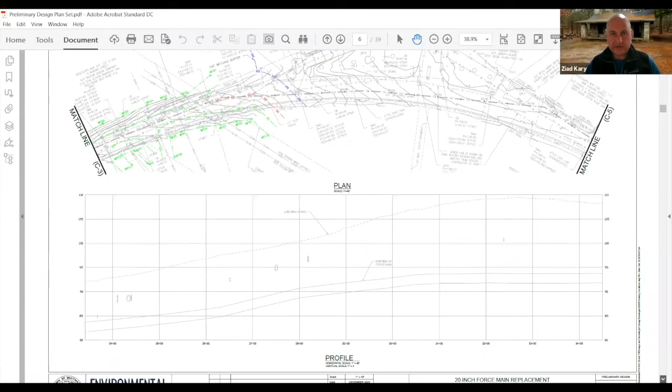Just a question on existing utilities: how much, if any, was done via test pits or investigation, or is it all just from record drawings?

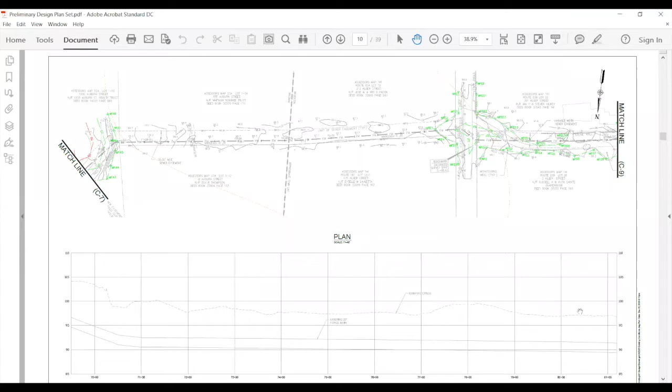So when we hired the surveyor to go out there, they did do a few things. For the gravity sewer, they shot rims and inverts and connected the dots for alignment, the proper way of doing it. They did the same for drainage, and for the force main we went back and forth, but located the manholes, air release valves, and blow-off manholes, securing the alignment that way. A lot of it was also record drawings and available information—no test pits were done, just anything visible on site compared to the records and confirmed that way.

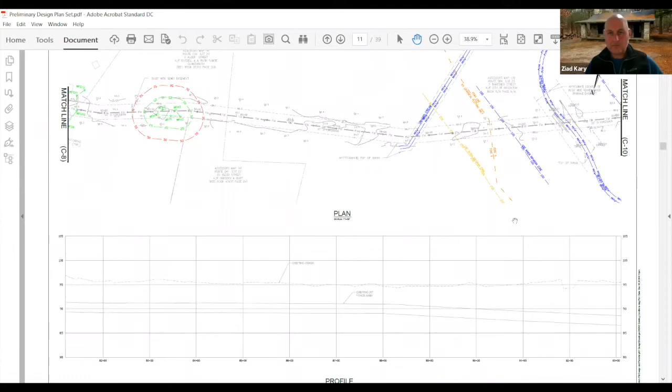So here we're still in the existing condition plan, and that's really for the whole alignment for the 16,300 linear feet.

Let me jump to this. Okay, so this is the Auburn Street facility, the pump station. Feel free to stop me if you have any questions.

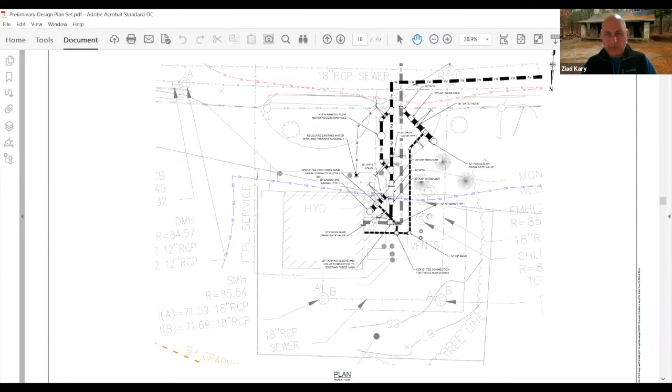Okay, and then we would leave the station. This is all happening on Auburn Street, so you could see it's staying to the south of the page. Anything you see here in the inset is for the other two pump stations, all connecting to the existing force main. Obviously you want to connect them to the new force main.

The way to do it, there's the blow-up detail further down. We could cover that as we go.

The profiles and cross sections show the crossing utilities, whether it's drain or gravity sewer. We do have the records for the existing sewer services. We have the records for water. Everything is there, done in pipe network.

The force main kind of stays at average depth. You don't want it to be shallow because you don't want anybody to hit it. You want it to be somewhere between 5 and 7 feet, and that's what we're trying to maintain all along.

Anything within the town right-of-way here on Auburn Street happens to be plastic pipe. It's PVC, DR18. It's a pretty thick pipe, robust, and rated for 235 pounds of pressure.

Same thing on Auburn, we continue to be on the left side. Sometimes there isn't a whole lot of separation. We're trying to maintain about 10 feet of separation between the two force mains. Last thing we want is for the contractor, while digging for the new force main, to hit the old force main or something else. We're trying to avoid that unless we have to. We have a couple of situations where we're tight, and that's really the case on Southfield and Brockton. We'll get to that a little bit later.

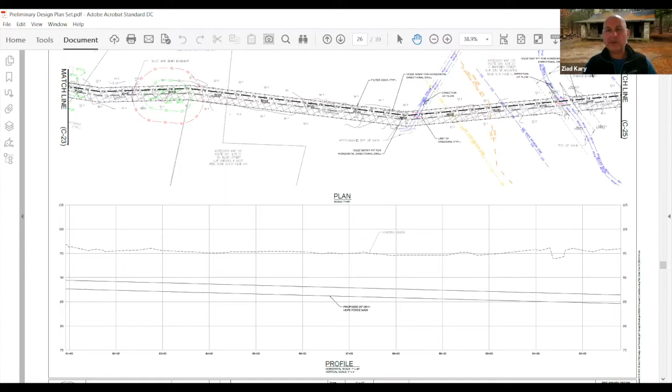This is the pipe you want to use when doing horizontal directional drilling. So this will be DR11 polyethylene HDPE pipe.

And Ziad, we're not doing a casing, right? We're just going to push the carrier pipe. Yep.

Like I said, the pipe is robust enough. And by the way, when we're on either side of the brook, there will be an anchoring system, because the polyethylene pipe is not like ductile iron — it has the tendency to slightly move with temperature. So to resist the pipe contracting or expanding, we put a dead man anchor on either side where it connects to the adjacent pipe once the HDD is completed.

Again, same thing, we stay in parallel. And now here we get into, we're still in the easement piece here. This is the manhole behind Massasoit, I think, where we take a sharp turn.

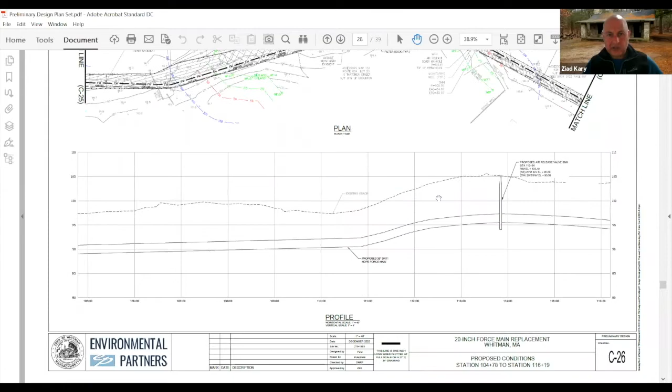And now we get up to Tetra Street. We come out of the easement. Short distance on Tetra, Brockton Auto Parts is here. I think we go across here. This is one of the other wells that I was mentioning, and this was about 3 feet.

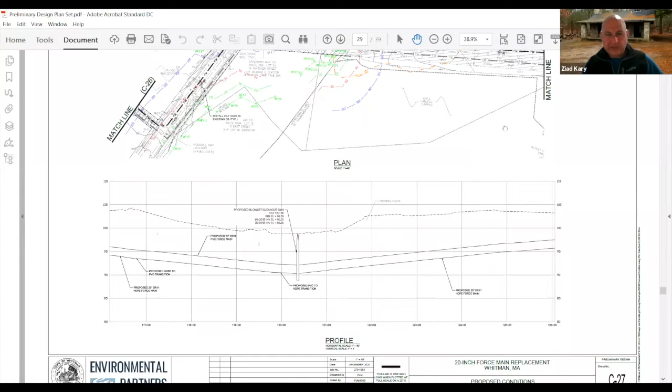We tested the water, nothing really funky. I thought maybe potentially something coming out of the landfill, but nothing there was indicative in the groundwater, so we should be good. We come across through the landfill grounds, and I don't know if you could see that close.

But this is the easement. See this line up here? This was a utility easement, and I think here was about 100 feet, believe it or not. But the issue is when we get to this stretch right here, that became less than 30 feet. And once they capped the landfill, this was reduced to only 10 feet. The only thing that's there is the current force main today.

So if we have a force main within a 10-foot easement, today's discussion with Mass DEP on the solid waste, the concern is, if we're putting a pipe in, there is a good chance that we may find trash, like municipal trash, and they don't want to damage the geomembrane liner. So they suggested, can you do test pits and then find out where is the limit of waste, so that way you're not damaging the liner, and then you could, they also requested a health and safety plan.

That kind of goes without saying because any contractor would have to submit a health and safety plan. And I think the concern is because the hydrogen sulfide coming off the cap of the landfill could be potentially not deadly, but it could be high concentrations where workers could be exposed to it and everything else. So what they're looking to do for this week, they're looking to get into the office at Mass DEP Southeast, dig up the information from the cap that happened back in 2008, share that information with us.

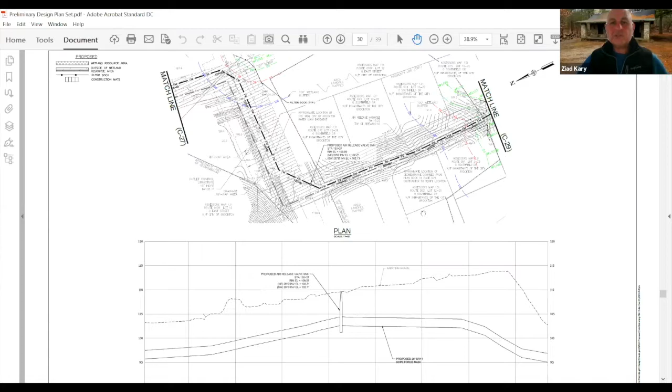The turnaround is pretty quick, he says, I'll work with you today on the call. He says, if you want it right away, I could just expedite it and then get it over to you. So I'm waiting for the information from them to be provided, and once that is provided, I would file for the minor modification, get the permit across.

And then we get into Southfield. Southfield is one of those situations where it appears the right-of-way is wide enough, but you look at what's existing there today, it is insane.

If you could see up here, specifically once you get off the landfill, there's a good stretch here that's not an issue—maybe 300-400 feet, it's really not an issue.

But there's an 18-inch force main owned and operated by the City of Brockton that services their system, coming down here and then up and over. This is our existing 20-inch force main to the south of the page. There's a 2-inch gas main running on this end, almost adjacent to the sidewalk, and that's the issue with our proposed force main alignment.

So I did a little bit of research, and this gas main is owned by Eversource. In previous experience, you reach out to the gas company and say, if this is on your capital improvement plan, this is the time—we could give you the courtesy to go ahead and replace it. At the same time, we could gain some space so we could fit our force main comfortably where we want to fit it. We're still working with them.

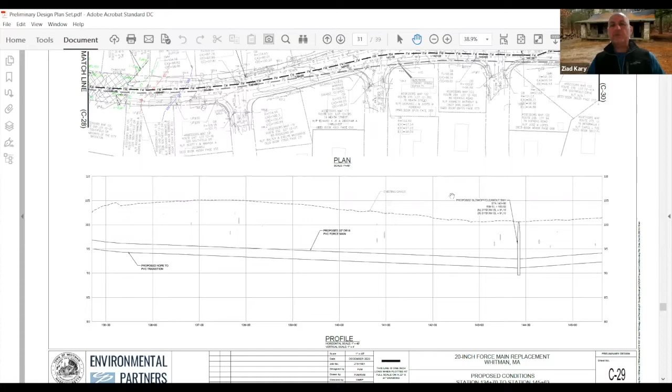I know for a fact, if we go in there and dig a trench, Brockton's probably going to come back and say you have to restore this curb to curb. So one thought: we could send in a crew today, before we even bid this job, like somebody from National Water Main, at 2 or 3 o'clock in the morning when the flow is minimal—we don't have to shut down the station or Auburn Street or anything. Have them go into this terminus manhole, send the camera through, assess the condition of the existing force main. If the liner is intact and the force main has no issues, somebody could make an argument we could connect just when you exit the landfill, and save about 2,500 linear feet.

Again, I'm not recommending this at this point—this is just a thought I have to share. And then the last-case scenario: if we don't have the room, we could stack the pipe, or offset them by a couple feet, so that if you need to access one of them in the future... it's not ideal, but it's something that was done before.

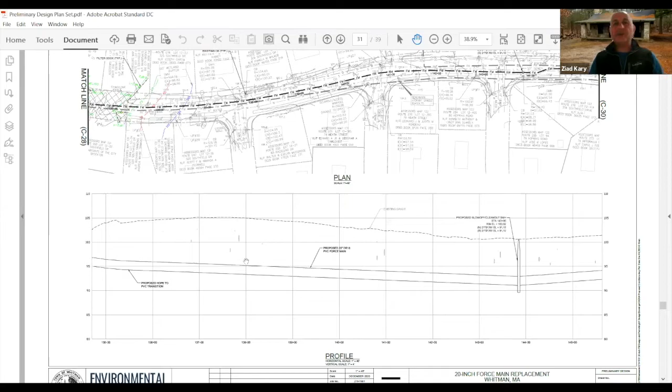I've seen it done on Nantucket, and I've seen it done in multiple places where you don't have the luxury of offsetting two pipes the way you want to offset them. But again, it is an option.

When we get down to it, if we're able to fit them all in, we can minimize shutting down the station at the end when this new force main is installed, tested, commissioned, and ready to go. So there will be a change of direction manhole that we put in here, and the new manhole basically keeps the flow going through the existing line. You put a manhole downstream, and then you direct the new flow to it from the new pipeline. So the amount of downtime to connect this new force main to the existing 21-inch in Brockton is almost minimal.

So those are the challenges. And definitely we have a challenge within the landfill, and certainly we have a challenge on Southfield that we'd have to overcome one way or another.

We do have some options, and if Eversource comes back and says, yep, we could move that gas main for you, and then they're not paying for excavation or restoration because we're going to do it under this contract, and they could upgrade the gas main, then we could have much more room to be able to put in this force main comfortably. That would be the best way to do it.

If not, we either have to consider shortening the force main a little bit, provided that the last 2,500 feet is in very good condition, or perhaps put the force mains closer together than we'd like. So those are the things that we'll have to discuss a little further.

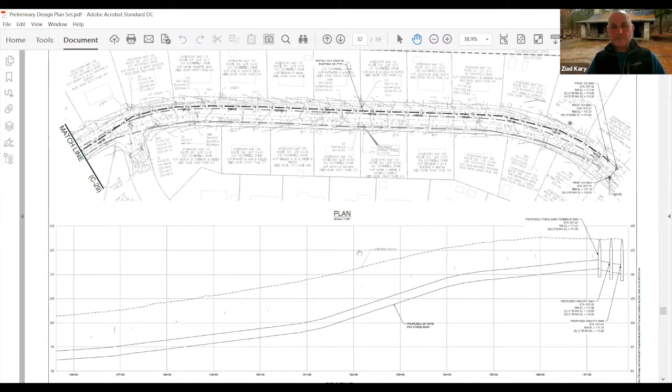In terms of the connections to the existing pump stations, the Auburn Street East and West—basically, if you have an existing force main coming in and this force main is connected to the station, what we'll have to do, this is the new force main to the right, and it would have almost a similar setup.

So it will be a tee connection, with isolation gate valves on both. And this is again true if and when the town decides to rehab the existing force main and make it a redundant pipeline. So you'd have to come back, and if you decide to switch flow between one and the other, use the isolation valves and decide which force main you want to use. This is true for both of the stations, the East and West.

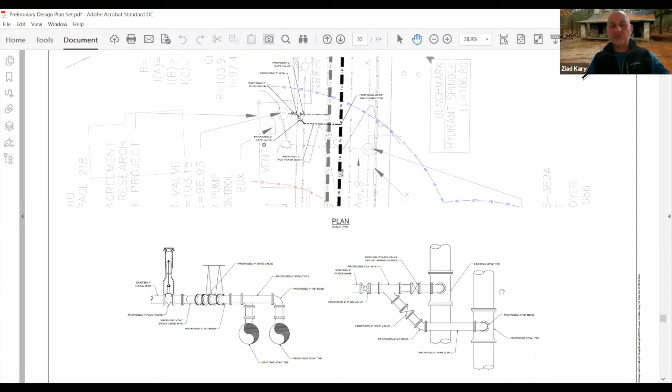This is for the other one here. And then we have the number of air release valves.

So the air release valves would be combination air release vacuum relief valves. Basically, when the force main is pushing, a lot of the intermediate and high points will let the air out, and then when the pumps stop at the pump station and the flow comes right back, there's a suction of air. So these valves are called combinations—4-inch combo air release vacuum relief valves—so that you're not collapsing the pipe, and you're not putting more pressure than the pipe could handle. We have 5 air release valves and then 4 blow-off manholes.

At low points, you could get in there, and there is a quick connect. If you take the force main offline for whatever reason and want to drain it, some of the low spots are not going to drain. So you go in there with a Vactor truck and connect to this 4-inch coupling at the base of the T, and then you could vacuum out the remaining sewage sitting in the pipeline.

When we complete the project, in the O&M manual we'll have a standard operating procedure, and we'll divide the pipeline into line segments. So looking between manhole number 1 and manhole number 2, this would be the remaining volume of waste that you'd have to pump out, so you know exactly how much you're pumping—so that you're not leaving anything in the pipe if you have to clean it up and put it in standby.

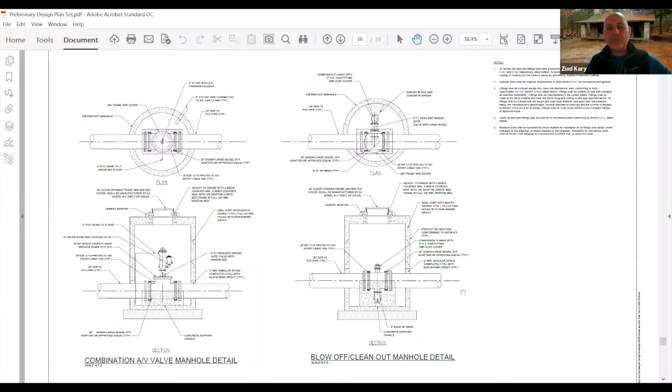Same thing, different case scenario. This is the fiberglass manhole we talked about putting in the cross country area where it's wet and subject to high groundwater table. The thought process is, one, don't get water into the manhole, keep it dry at all times, and two, make sure it doesn't deteriorate, because concrete over time, especially with groundwater going in, there's some delamination.

So I think the FRP or fiberglass plastic manhole will go a long way, and we'll keep it slightly above the groundwater table, at least visible, and prevent water from going in there.

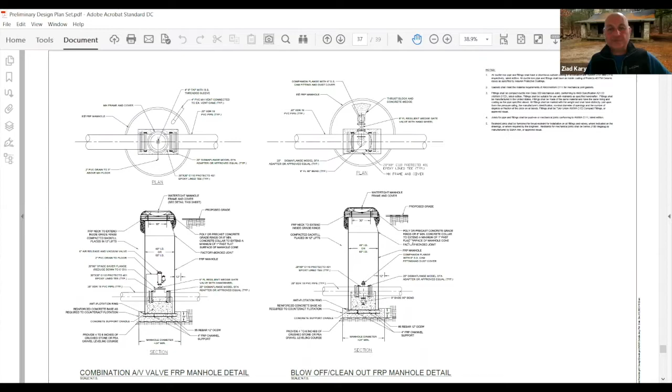These are just transitioning. There will be a time where you're transitioning from polyethylene to PVC when leaving the main right of way, going into the easement. The transition requires a little concrete encasement, just because the different pipe materials move differently. A ductile moves the least, PVC moves a little bit with temperature, and polyethylene moves a little more than the PVC.

In addition to the restraints, you add a concrete weight to make sure the pipe is not going to pull out. It really only happened in a couple of different places where we transitioned from one pipe material to the other.

This is the matting that would be taking place in the easement. Basically, if you think about it, we cannot cross somewhere along, halfway through that cross-country easement, we can't continue going across because of the wetland and the unnamed brook and Beaver Brook there. So you get to a certain level, come back, and then go the other way.

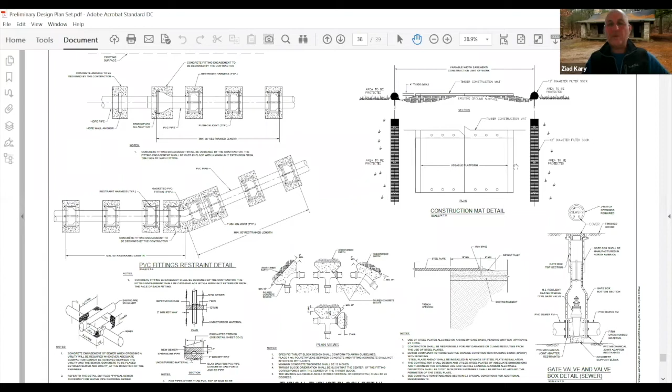And this is the hay bales or straw wattle, and within that 20-foot or 30-foot easement, depending on the width, the matting would be installed there. Just the rest of it, these are general details we provided to minimize the amount of disturbance within the cross country.

So we have a polyethylene pipe. The bedding would be about a foot below the pipe. They're not going to allow us to build the road on top, so I didn't want to commit to loaming the entire easement. We just said, okay, whatever comes out of there would be put back. In other words, you're not really incurring additional expenses to bring in imports such as loam to put on top of the easement.

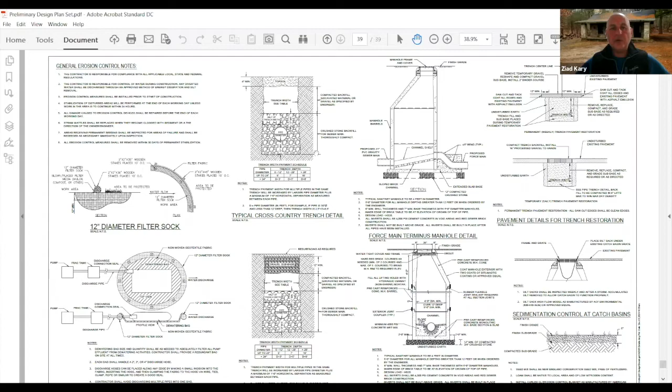So we're going to be working with them on perhaps anything that could be chipped and put within that 10-foot stretch, so in the future Dennis and his crew could be riding back and forth servicing these manholes, and that's the intent. We made it clear to MEPA and the folks at DEP and the conservation that these manholes have to be serviced and accessible at all times, and we cannot simply let the growth come back and not allow the crews to access these manholes.

So that's, I think, the big picture.

Down in Southfield, I'm assuming that gas main's old. I'm hoping it is old. We don't really have the record. I don't need to tell you this, Kevin, but I think the gas company's information could be a little slow sometimes.

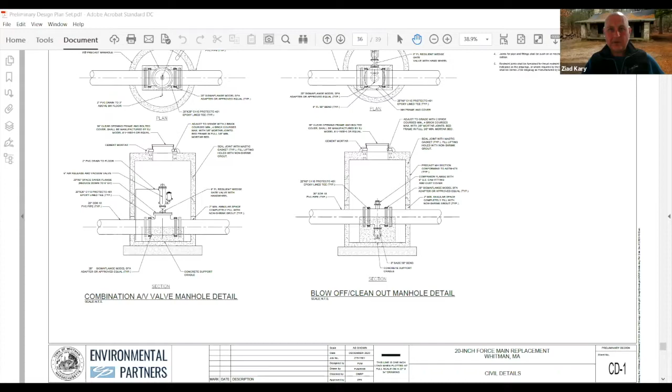I'd be in favor of relocating the gas main, to be honest. Me too, I don't want to not replace it. It doesn't make sense to go 80% and leave the last 20% or whatever the percentage is, especially where it's not, even in our town. You know? Exactly. They don't do this, right?

Yep, okay. So this is the landfill. I just want to be able to see if I could put this guy here, so at least you know the condition of the roadway.

So this is Southfield. This isn't really the worst part, but you can look at what's left of the pavement, nothing really left, right? So if we dig a trench here, by the time we get down 6 or 7 feet, we're going to be 7 or 8 feet across. Nothing's going to be left of the roadway. They're probably going to come back and say, well, we want you to rebuild the whole thing. You can see some of our roads, I gotta say. Frankly, I think we've got to commit to it here on Southfield. We're just going to show it so.

Based on the MEPA review the other day, Dennis and I have been reaching out to Brockton as a courtesy, and they requested not the commissioner but the buyer or the agent. Dennis, I don't know what David Norton's position is, but he was asking, can you share the information with us, because we want to know where you're putting the manholes and everything else. I said sure, and this week I requested record drawings on Southfield - water, sewer, any information they have on file - because we want to make sure we avoid conflict. We don't want to just show pipe on paper, we want to make sure the pipe is going to work. In the past we've sat down with them and given updates, maybe 2 or 3 different times, just to keep them in the loop, and we offered the same thing here this year. They said, well, not at this point, but when the time comes, we'll let you know. So for the purpose of the restoration on Southfield, I'm just going to show a permanent trench repair when the pipe is in, and we'll commit to that, and let them come back and tell us otherwise.